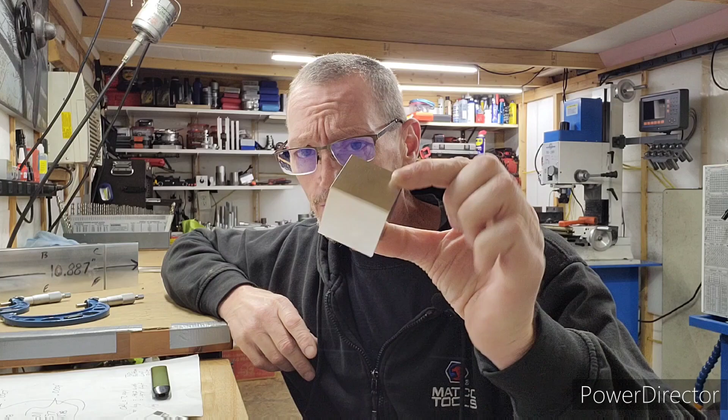So anyways, I did a squaring video, and everything is covered in that video on how to square like a pro. And I mean square. We did this block in that video, 4/10,000ths of an inch square. I made this block in that video, and I explained how to get a machine to do this, along with the person who's operating the machine, because the person is 95% of how this happens.

So anyways, we had a block. Let me bring this up here a little further, let you all see this. So we had this block. It was too long. It measured 10.887 inches. And I went ahead and removed that piece I said I was going to, and that's now out of the equation. So it's no longer 10.887 inches. It's... let's take a look real quick. I think it was 755. It's, excuse me, 7.955. Just slightly under 8 inches.

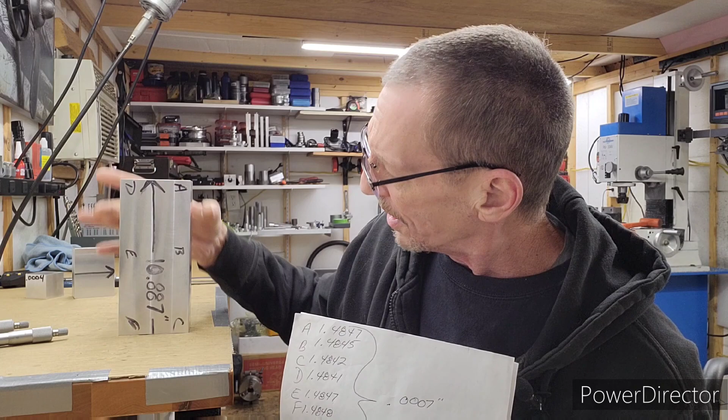So I went ahead and finished squaring this, and I did a video and had the mic off, and I actually did all the measurements on that. We have A, B, C, D, E, F, and there were the measurements I took. They're within 7/10,000ths of an inch. So over this distance, this dimension here is 7/10,000ths of an inch flat, parallel, which is primo stuff, real good stuff. I also do these 3 here, 3 spots: 1, 2, 3. They come in to 4/10,000ths of an inch. And I'm going to measure them here in front of you.

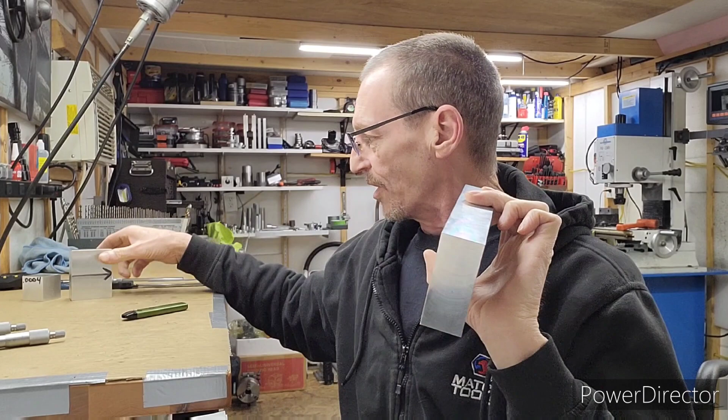I did this yesterday. I just finished milling these ends, bringing these ends in after I removed this. And it had a little heat in it still, not much, but it had cooled off, and one of my measurements had changed by like 4/10,000ths of an inch. So, and the fact the microphone was off, I went ahead and deleted that video. I was measuring it on the video and writing these numbers down, showing you how accurate I can square up a block of this length on that little PM30 mill back there.

Now remember, I put a lot of elbow grease in that mill to get it to do this. That mill would not do this when I got it. It was damn close, but not this good. And it was really just stoning that brought this in to where I can do squaring this accurately. My parallelism here is absolutely impeccable. Okay, so let's do some quick measurements here before we get this set up on the mill, and we'll go over what we're going to do today on the mill.

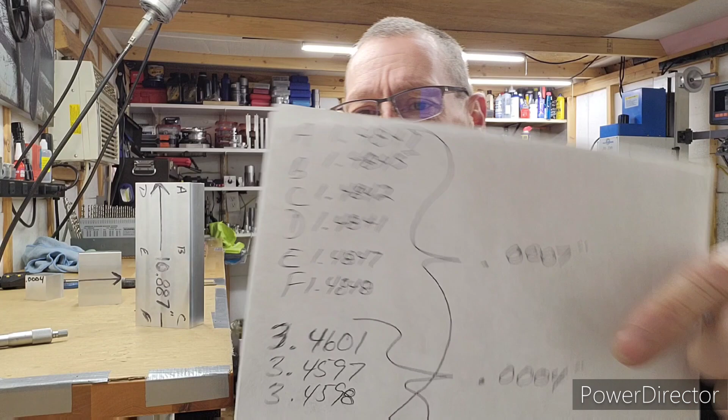So let's do our 6 measurements here. Here's the 6 I got with a little warmth yesterday. Came in, I turned the heat on. It was in the 40s in here. It was like 49 degrees when I walked in this morning. So this was cold. So this has expanded and contracted, you know, to the room temperature here. So let's see how accurate our numbers are. Again, here are the numbers that I got yesterday doing the video with no microphone.

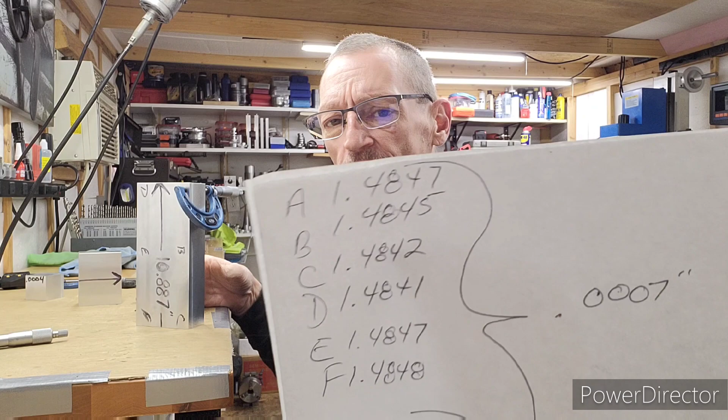So let's clean our tips. Always clean the tips to your mics. Throw a measurement off real easy. I already cleaned it, but we'll do it again. Okay, A. Lock. We had 1.4847 for A. We are sitting at, this is contraction and expansion of material right here. It's only ten-thousandths. We are sitting at 1.484. 1.484 4 tenths. Okay, that's A.

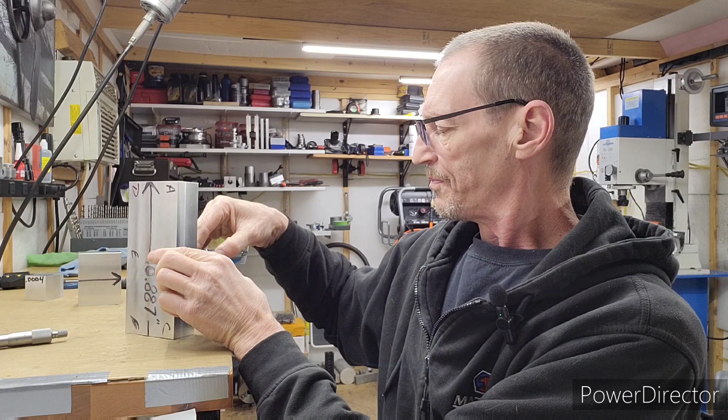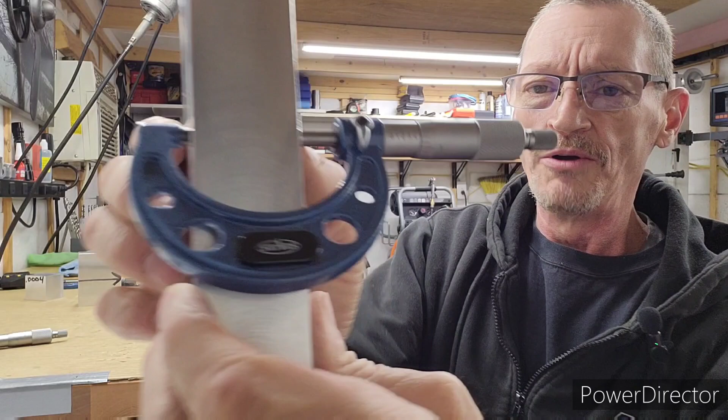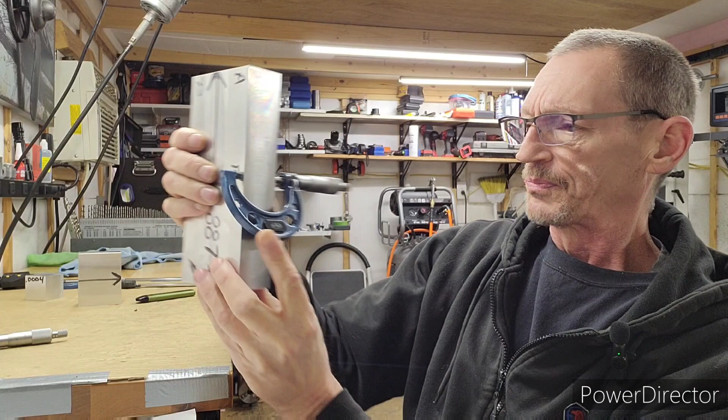Let's do B. I want to do this quick. 1.484. I'm going to say 8. Dead on 8. 1.484. I don't know if you can see the tenth there. It's 8 ten-thousandths. There you go, 1.484. We're within 6 ten-thousandths of an inch already.

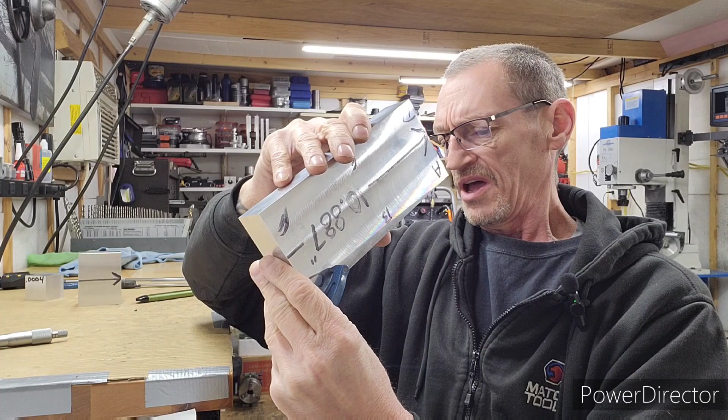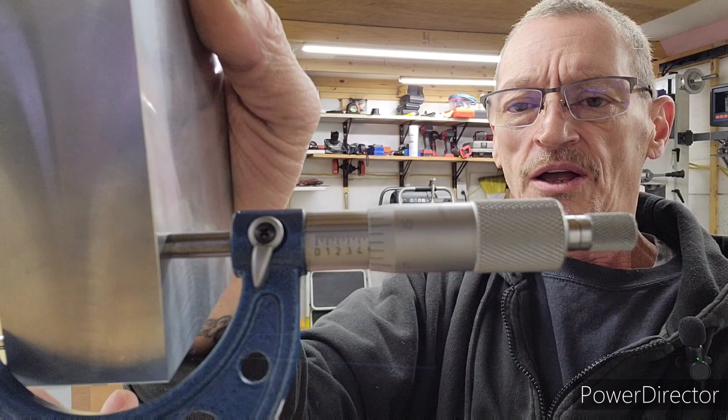Going down here. Okay. Trying to keep the mic. Here we're at 1.83. No, 84. 1.84, around 4, I think. I'd say it's 5. 1.4845 tenths. I think you can see the 5 tenths right there. Okay. So we were at 2, 7, and 5. So we're 5 ten-thousandths of an inch. We're half a thou right there in these 3 measurements. Now let's do these 3.

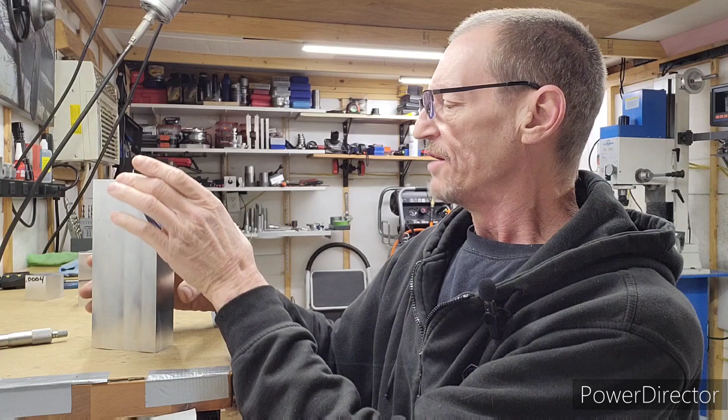We're at dead on 8.4. Dead on 8.4. Okay. E. We're about 8.42. 8.42.

Okay. Yeah, it's no bullshit. We're proving it. We're not just saying it. This is good stuff right here.

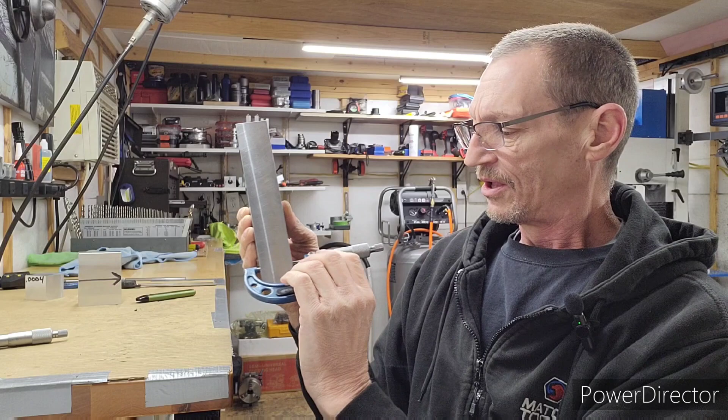8.42. 8.42. So we're half a thou. Half a thousandth. This was 7 tenths yesterday. And with a little expansion and contraction at room air temperature, we're now sitting at about 5 ten-thousandths. This is nearly 8 inches long, and I'm within a half a thousandth in parallelism on this dimension in 6 places. So that's accurate. That is impeccable work.

Now, let's do this width. I came in to 4 ten-thousandths on these 3 measurements. I go in the middle, right there in the middle, in 3 places. This requires the 3 to 4 inch mic. All right, see what we get. Do it this way. A's at the top. We're sitting at 3.460. Our measurement was 601. 601. Okay, so we're 1/10,000th difference.

Come down the middle. And we're sitting at about 598. And we had 597. Let's see what it really is. It's 597. I don't know if you can see the tenths. When you start getting into the sevens and the higher bits, you got to turn it like this. So there you go. So far, we're on the same numbers.

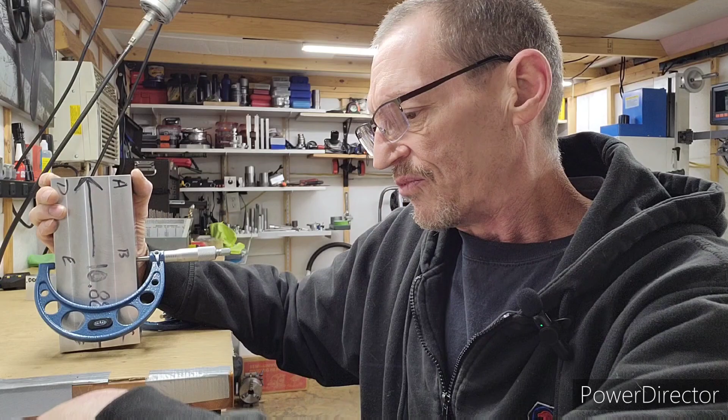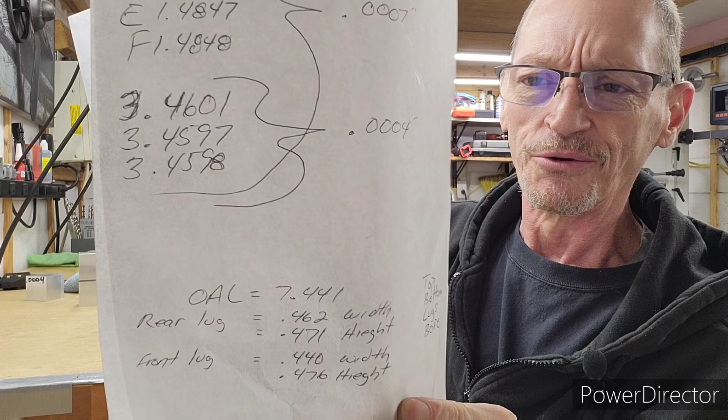One more number. I'm sitting at 6. This is 598. There's a number. 598. Number 3 right there. 3.4598. And we are sitting at, let me make this so I can show it to you. We're about 598. I'm not even going to look. I know it is. So, okay. So those numbers are still dead on.

Okay. So we're sitting at 1/2 thousandths parallelism on this dimension and this dimension. And I know here, I don't have an 8-inch mic, but I know this is to the thousandths, to a vernier, to my large vernier, which is here. Not a high-end vernier. So let's zero it. 0. I think it's 955. 7.955 is what I come up with.

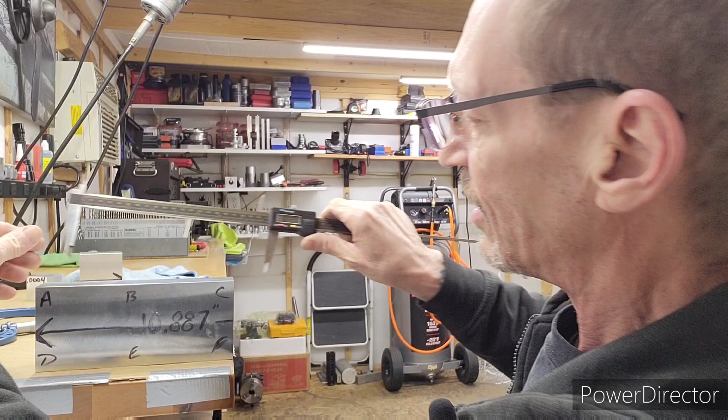And that was, I need to show this. I hope you can see this. Let me turn around here. I think you'll see it. It was 955. We're still sitting at 955. It says 954. Remember, it's a vernier. 953.5. So within 1/2 thou, according to this. So we have an extremely squared workpiece.

That is accuracy. And again, there's a lot of elbow work put in that mill and a lot of experience behind machining that allows me to square a piece like this on that little PM30 mill back there. You saw the mic numbers. You saw it. It is what it is.

And again, where's my little square? My cube here. This is just a beautiful piece. I love this little piece. I will never get rid of it. I keep it ever since I made it. I keep it right here next to another block I've squared to 1/2 thou. So this is where we're at.

I had a guy make a comment. I'm not going to say his name. I did a quick squaring video because I was proud of the work I had done, and the guy made a comment that I don't do any machining in my videos. I do nothing but clickbait, and all I do is talk, and I was lame. Well, anybody who watches my videos knows every single video is nothing but machining. So this guy, without question, has something else going on there. He wanted to just show a little ignorance, and he did. And of course, we all know that that's not the case. So I deleted that video.

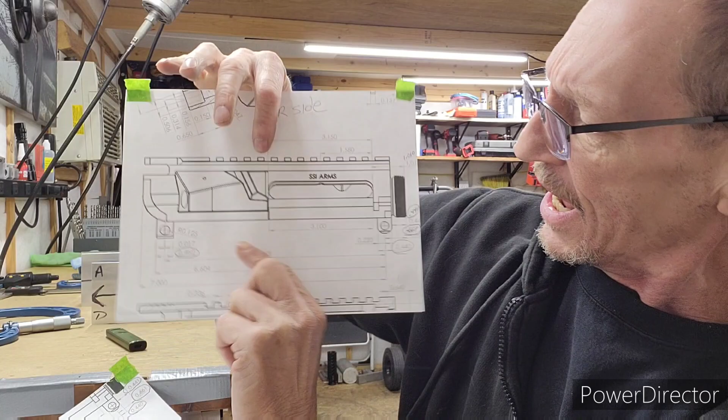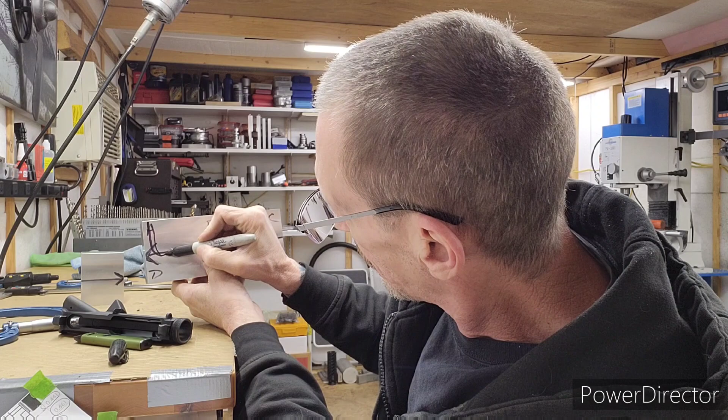So we're going to start here today. We're going to take this block and we're just going to do a profile in the block. So basically, we're just going to do this profile, okay? And we're going to put our lugs in. Let's just say it's right here. Comes down, lug. This is just reference. Comes across, lug. So that's what we're looking for right now.

So we're going to zero off the top. We're going to come in and cut our bottom flat. We're going to cut this flat, and we're only going to do a profile in the block. We're not actually cutting this out. We're cutting the profile into this block. And everything's being rough cut right now, not finish cut. So we're going to keep everything larger than our finish until we're ready to finish.

But we're going to profile the lugs. We're going to cut our reference point for this bottom flat, and the top's going to come off here. Okay, and then we're going to set it up and do a bore for indicating in, so we can do this bore. My 1-inch reamer is supposed to be here on Monday. I ordered it over a week ago, and they're saying it's delivering on Monday. Also have some cutters coming to do the internal work.

I still need to modify my broaching kit, so I can do a little bit of broaching right here. It's not going to be much, just a little bit, because of course we can't pass this spot with the cutter cutting the internal raceway or slot or channel, whatever you want to call that. I think a lot of people in the gun world refer to that as a raceway, the bolt carrier charging handle raceway. So anyways, that's where we're at, and that's what we're going to do today.

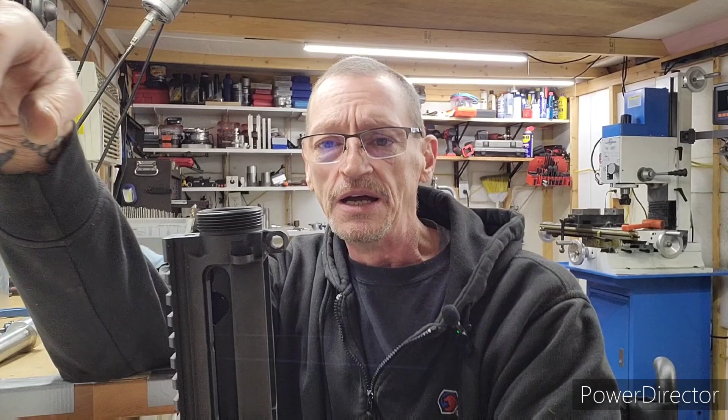Let me get this set up in the mill, and we'll go ahead and start to cut our profile, our lug locations, and then we'll start our bore. I'm probably not going to get the threading done today in this video, but I'm going to do the bore and the threading all at one shot. I'm not sure exactly how I'm going to cut this OD right here yet. I can do it in the lathe or the mill. I think right now I prefer to do it in the mill.

I also ordered an angle plate. I do not own an angle plate, but I do now. I have one coming. The reason being is because I want to set this up on an angle plate in the mill so I can do a real accurate bore, and then do that precision reamer of the last 5 thousandths, 10 thousandths of an inch to our bolt carrier bore, and our rifle where the barrel mounts. All that's a 7-inch bore, so across 7 inches of length, it has to be extremely accurate.

When I have an angle plate, I can get a lot more surface area clamped. Instead of holding it down like we did the handguard. I didn't have that angle plate, but I would have used it if I had one back then. But it's become important at this point, so we have one coming. I ordered it, and it wasn't expensive.

Unfortunately, the accuracy of this angle plate is supposed to be within 2 thousandths, which I would prefer be a lot better than that, but that's where it is, and we'll see what we have to do to get it better than 2 thousandths. It might not even be 2 thousandths. It might be very, very accurate. With surface grinding, it's difficult not to get something perfect. If you're out 2 thou in parallelism, something's wrong there because the surface grinder is extremely accurate. So anyways, that's how we're going to do this.

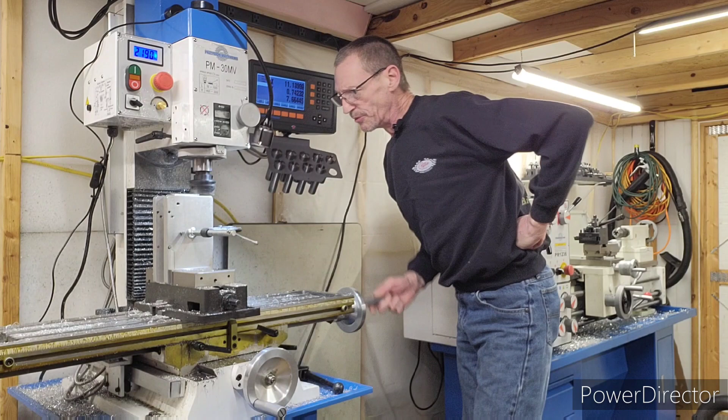This final cut's only about 5 thousandths. And I brought it within 2 thousandths of the final dimension. Beautiful finish, like a mirror. I'm going to make 2 finish passes back and forth, just clean it up, make sure it is where it's supposed to be. You always get a little debris off. Not much, but a little bit.

Not bad at all. All right, I think we got it. Actually, I know we do. I'm not even going to bother measuring it. I'm taking it right out.

Okay. Machine's off. But as you can see how I did this, this is to add rigidity to the part. When you got something sticking out of a vise that long, you're asking for trouble. You go back to the handguard video, and I just stressed it constantly through that video. This is not how you do this.

This morning, I ordered myself an angle plate. I do not own an angle plate. When I do the bore on this, I've decided to do it mounted up against the angle plate. So I have the entire surface area of the workpiece against a rigid angle plate. And it's going to be clamped and indicated in along its edges. That's the way we're going to do this.

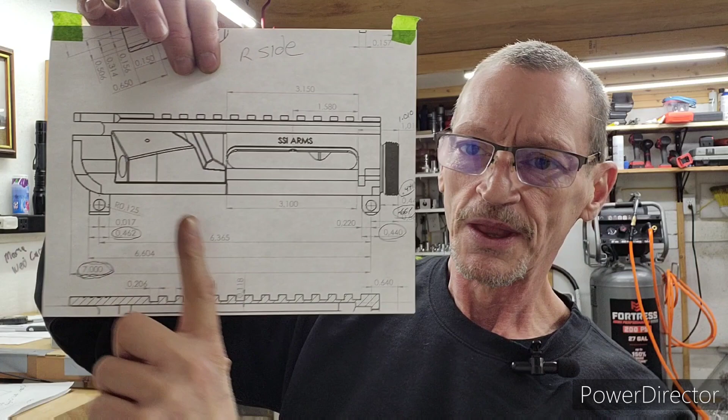Just pulled it out of the mill. As you can see, I have it sitting here on the flattest plate I own. So our numbers are right here. So we were looking at 700 and 661. So 700 is from the back side here to the center of that lug. And then from the center of the lug to the front of the receiver is 661. So we just add those two together. And that's where we're at. We're actually sitting at 765.

So we're now ready to set up, pick up our edges, and we're going to cut the lugs, the flat in the bottom. And at that point, we'll pretty much be ready to set it up and start the bore. So right now I'm going to set it up, and then we'll do some time lapse on this one because this is going to take a little while. We got to drop, I think, 470. Let's take a look at this print with you.

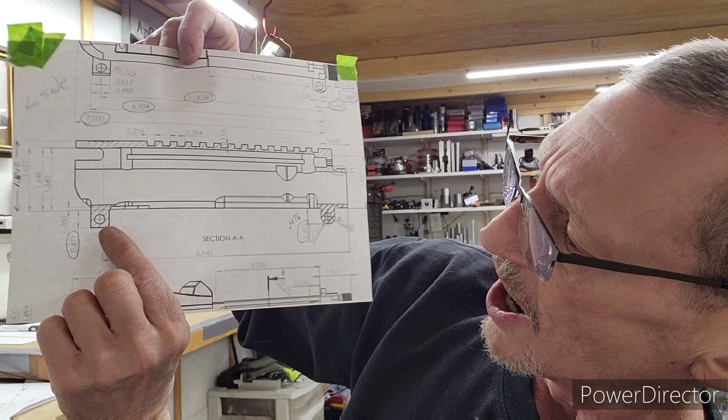So here we are. There's the print we're going to be working off of for cutting the bottom. So we're looking at our dimensions and heights here. We have a height of the rear lug and the height of the front lug, and they're different. The front lug's 476. The rear lug is 471. And our height here, plus the lugs, I've already obtained. So this is already at a finished depth.

Actually, it's within a couple of thousandths. I always leave a couple of thousandths, just in case. It's always smart. We can knock a couple of thousandths off, no problem. After we're done machining the lugs, we can shorten the lugs by a couple of thousandths because this is the length. So we're going to go in and cut basically a U channel out of this, and get them lugs and the flat cut on the bottom.

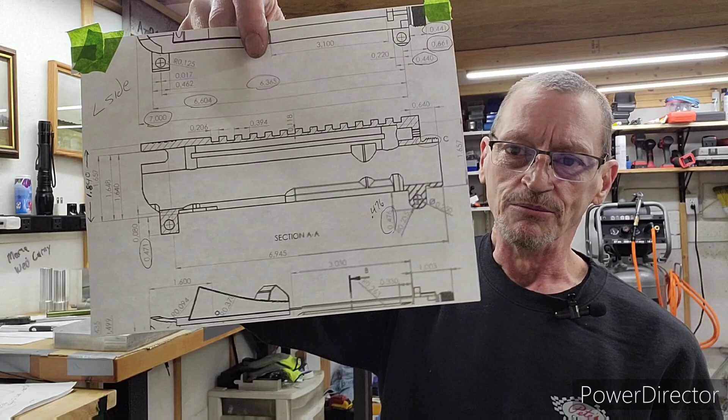But there's the print, the numbers we're going to use for this next operation. So let me get this set up. I'll get my edges and I'll get my zeros, and then we'll do a time lapse of cutting these lugs. All right, get busy.

And we're picking up 0. My edge finder is 200 wide. So once it goes off center, we got our 0. We move in 100, and that'll be dead center to the edge of the workpiece. We're going to do it on the back side and this side. We're going to 0 on this corner. This back corner is going to be dead 0. And then we're going to get busy.

So I'm going to go ahead and indicate this in, get my 0 set on the DRO, and then we're just going to do a time lapse of cutting these lugs. It's going to take a little while. So let's do some machining. We don't want that one gentleman to think we don't run these machines.

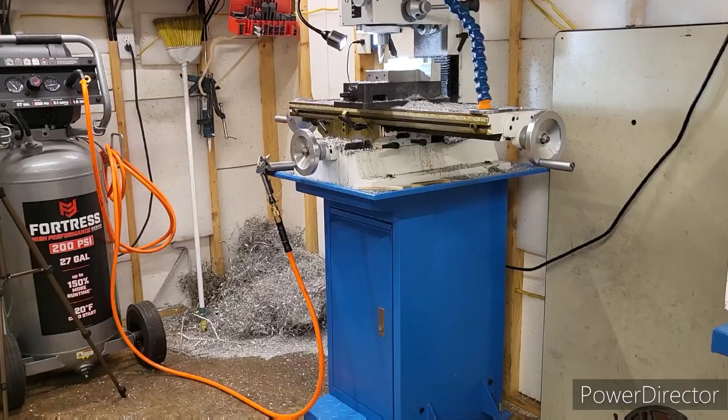Okay, so we just finished doing the front lug. We went ahead and did our width all the way down. Now we're going to come over. Actually, I'm going to go get something to eat. And then I'm going to come out here and do the other width all the way down. Then I got to remove all that out of the middle. So it's quite a job. But we're going to get her done today. At least get these operations done today.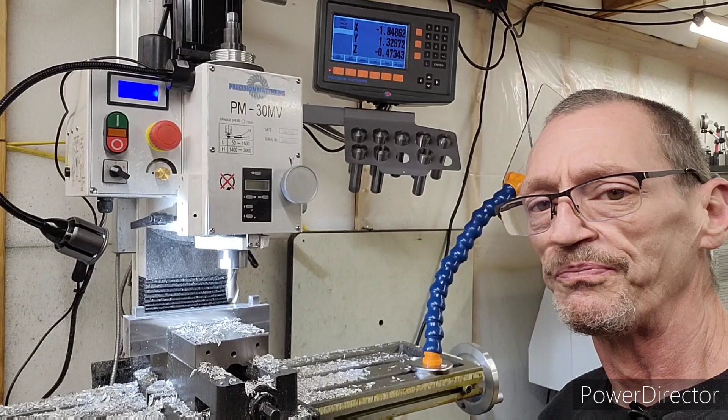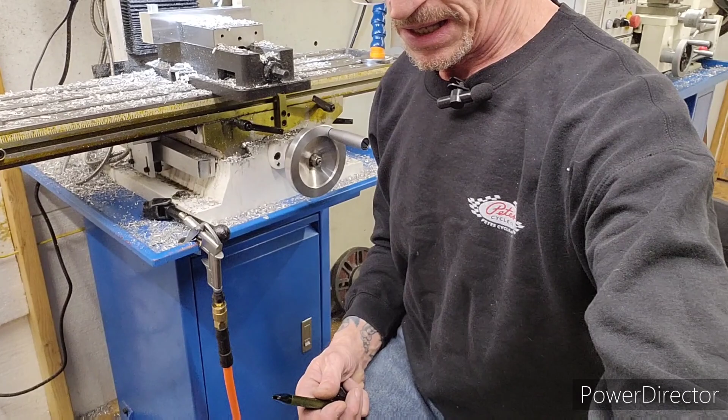Just finished cutting the lugs. All right, let me give you a little close up here. I mean, we got a little finish work to do, but we have our lugs cut. There they are. So I think I'm pretty much going to call this done for today. It's been a lot of work. Yeah, but I'm breathing good.

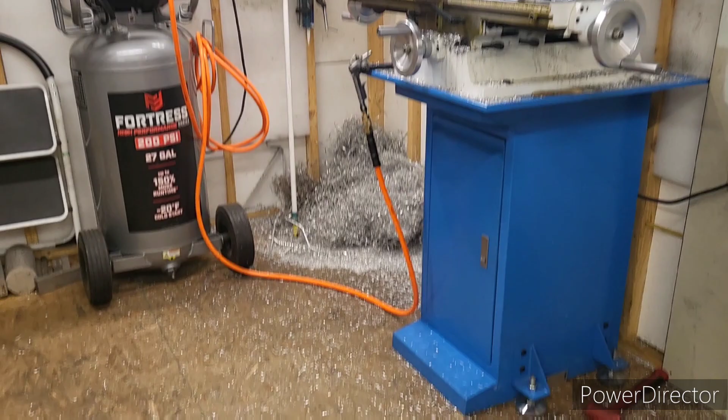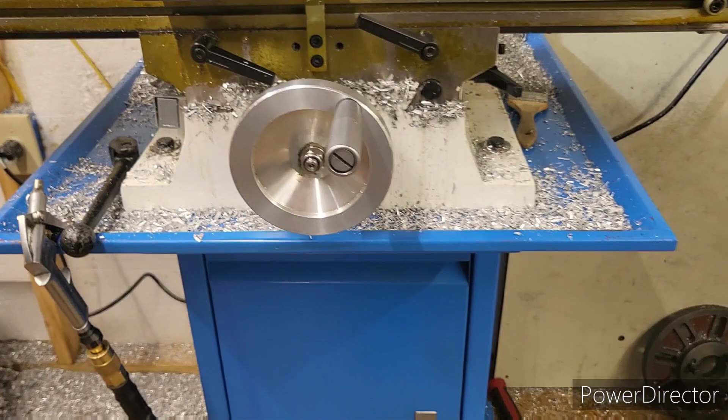All right, I'm gonna move this over here and I'm gonna pull that out of the mill and we'll talk real quick and get this done. Yeah, all right, I'm gonna shut this down and pull that out and then we'll do our last little talk here and we'll call this done. Okay, look at this floor. See, our corner is getting pretty full. And of course the mill is covered. Let's take a good look at this. Yeah. Yes, nice little pile of rubble.

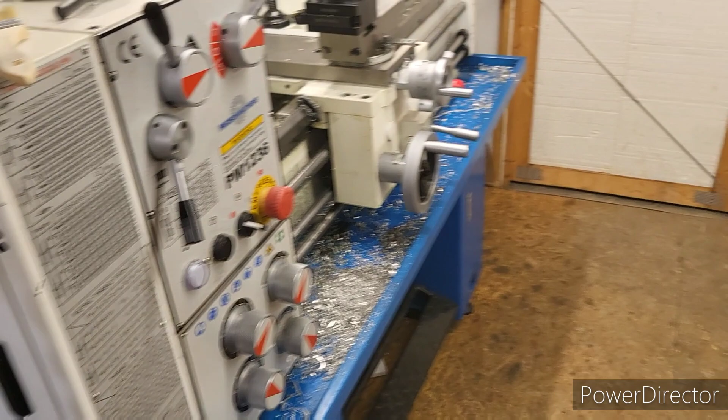Yeah. Okay, let's pull this thing out. I'm using one hand here. Got my vise. Pull this out. You gotta break some edges. Yeah. Oh, believe me, it will be what it's supposed to be. Okay. Let me turn this off and get it set back up here on the table, and we'll go over these prints and we'll go over that part.

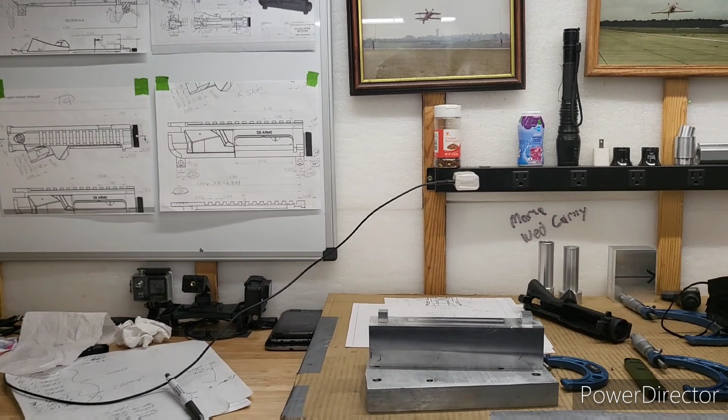Okay, well, it was just boring machining. I mean, all we were doing was achieving a depth, dimensions of our lugs, and getting our flat, our depth and our height. But we achieved that today. It's been quite a bit of machining today. That's quite a bit to take off. I was using a 2-flute 3/4 inch end mill, and it was vibrating the living hell out of the machine because the 2 flutes hitting. 4-flute would have been much smoother running for sure.

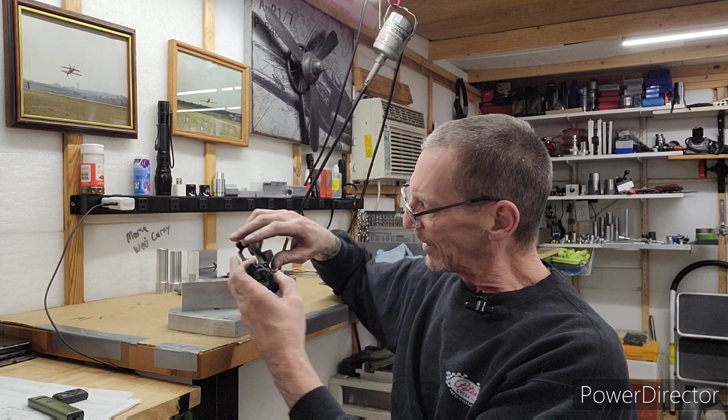But here we are. So we've got our lugs, and basically, there you go. We are there. Says perfect flat right there, so everything's on the money. Got to break some edges here. Really happy with this. Really happy with it. So there's the beginning of our AR15 upper receiver.

So at this point, I got an angle block coming, so I can get the complete surface area clamped, so I can do the bolt carrier bore, barrel bore, barrel mount bore, and we got to do some threads. And that's going to be the next one. This is part 2. I'm not going any further today on this. This has been quite a bit. So just a video saying we're moving forward, but this was just boring machining. I could have done this and just showed it to you, but like I said, I got a complaint that I didn't do enough machining in my videos. So anyways,

I never did go get anything to eat, so I'm gonna go get something to eat. And I'm breathing so much better. I haven't done many videos, of course, since part 1. But I'm breathing better. I really am. I'm having some issues at night a little bit, just putting pressure on my lungs and stuff. But we're doing well, so we're cruising right along.

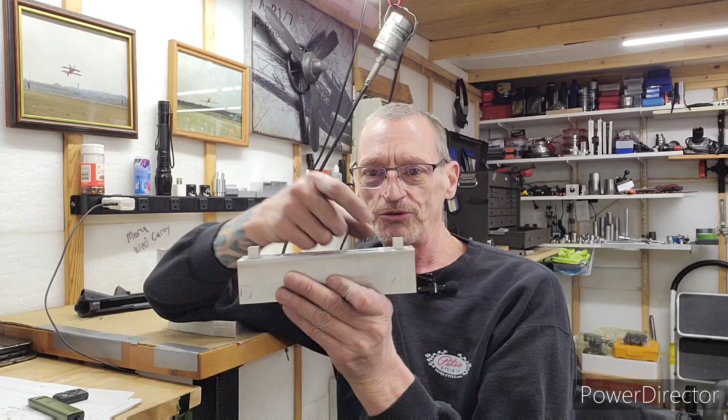So at this point, next video is going to be we'll punch our 250 holes in our lugs, and we're going to set up and do our gas tube hole and our barrel bore, bolt carrier raceway, or whatever you want to call it, bore. So that's where we're at. This is part 2. We're done.